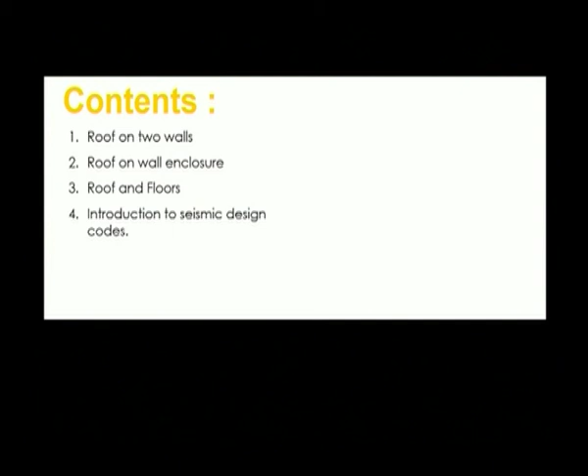Now, in this particular lecture, you would be seeing other various structural or building types or wall types, structure types, and how they would react to the earthquake and how they would behave when struck by the earthquake. So the contents of this particular lecture are the roof on 2 walls, the roof on wall enclosure, roof and floors, and also this lecture introduces you to the next chapter, that is the introduction to seismic design codes.

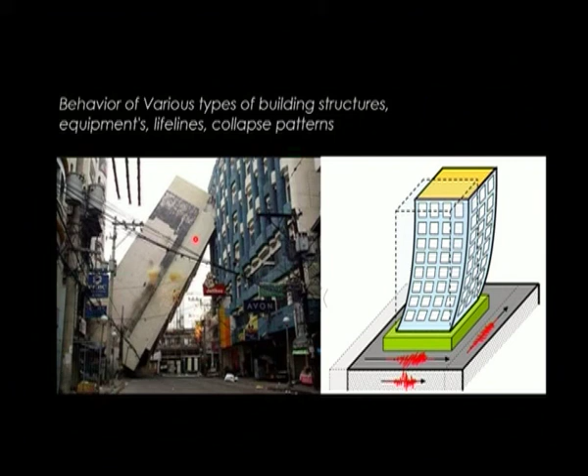So as I said in the previous lecture, behavior of various types of building structures, equipments, lifelines and collapse patterns is what we see in this particular unit, that is unit 2. And as you saw again in this particular lecture, you can see that this building is giving up to the earthquake and falling on another building, that actually creates a stacking and everything collapses on top of each other, creating a larger debris and a larger issue.

Now we will be seeing what will happen if there are 2 walls, not an enclosure, and there is a roof. So there is no enclosure, it is just 2 walls and a roof. This picture shows a devastating earthquake that happened a few years back, and how everything fell on top of each other. So now in this picture you can see 2 walls, that is both B's. These 2 walls are not attached to each other, they are sitting on the opposite sides, and so they are both B's, there are no A walls, and then on top of that there is the roof.

So in the figure, a roof slab is shown to be resting on 2 parallel B walls, and the earthquake force is acting on the plane of the walls. If you can see, this is the earthquake force that is happening on the plane of the walls. So assuming that there is enough adhesion between the slab and the walls, that is, assuming that there is enough stability or enough mortar or enough whatever is sticking the wall and the roof together, that is strong enough,

assuming that is strong enough, the slab will transfer its inertia force at the top of the wall B, causing the shearing and overturning actions in them. So what happens is, when something is resting on top of something, that something kind of transfers its load and tends to take support from what it is sitting on.

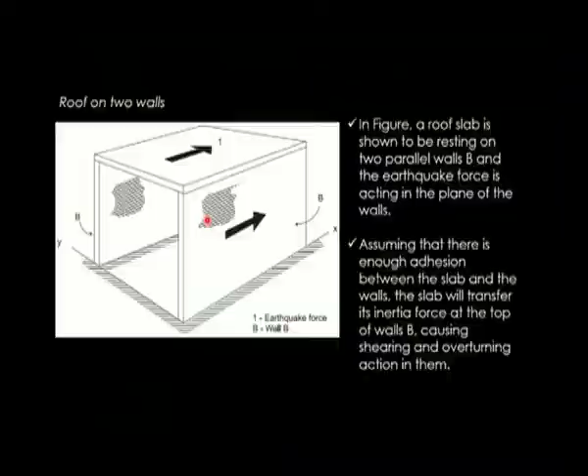So what happens when the earthquake strikes? These walls will have their own inertia acting on them. As long as this particular wall doesn't act as a shear wall, they bend. Because of the inertia coming from the roof to the corner of the wall, as well as the inertia on the wall itself, they try to overturn. If this wall is strong enough and acts as a shear wall, that wouldn't happen, and it will have enough strength to withstand its own inertia as well as the inertia from the roof.

Moving on to the next section, that is roof on wall enclosure. So previously, first we saw just a wall, then a wall enclosure, then two walls and a roof, and now we are seeing an enclosure with a roof on top of it, and what happens.

So now consider a complete wall enclosure with a roof on top, subjected to earthquake force acting in the x-axis. In this diagram, you can see this is wall A and there is another wall A here. So there are two parallel A's, two parallel B's, and then the roof, and this is the x-axis and the y-axis, and the earthquake force is acting along the x-axis, as shown on top of the diagram.

If the roof is rigid and acts as a horizontal diaphragm, its inertia will be distributed to the four walls in proportion to their stiffness. So the roof is completely adhered to the wall, the bonding is really strong, and the roof is strong enough to transfer its inertia into the supporting walls. If the roof is almost entirely rigid, then the horizontal diaphragm will distribute its inertia to the four walls in proportion to the stiffness of those four walls.

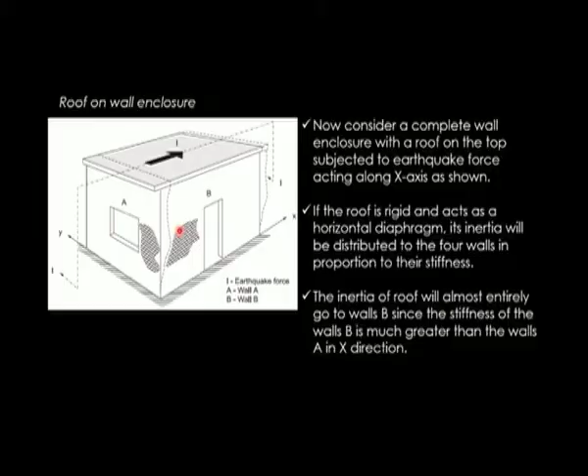In the x direction, since the stiffness of wall B is stronger than wall A and the earthquake force is acting towards the wall in the x direction itself, what usually happens is that if the roof is rigid, they would almost entirely distribute the inertia into both the parallel B walls, not the A walls. So in this case, the plate action of the walls A will be restrained by the roof at the top and horizontal bending of wall A will be reduced.

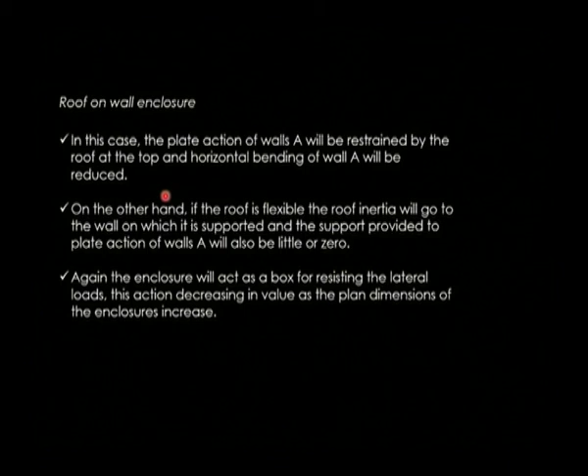On the other hand, if the roof is flexible, then the roof inertia will go to the wall on which it is supported, and the support provided to plate action of wall A will also be little or zero. So already there is a plate action that is happening on the wall, and that will be restrained by the roof because it is not transferring load to that particular wall in the first case that we discussed.

But if the roof is not as rigid as we discussed and it is flexible, then the inertia would be going to all the walls which support the particular roof, and the support to the plate action for wall A will be little or zero. Again, the enclosure will act as a box for resisting the lateral loads, and this action decreases in value as the plan dimensions of the enclosures increase.

The next thing that we will be seeing is roof and floors. So we already saw wall enclosure, and wall enclosure and roof. Now we will see roof and the floor. So an earthquake induced inertia force can be distributed to the vertical structural elements in proportion to their stiffness, as we discussed before, provided the roofs and the floors are rigid to act as horizontal diaphragm.

If you can see in this particular picture, earthquake force 1 is acting, there is a floor, there is a roof. So if the roof is rigid and the floor is rigid, then the horizontal diaphragm action happens, and they split their inertia into the walls based on their shearing capacity. Based on their structural strength, they will be getting the loads, and the building will actually withstand it and stay.

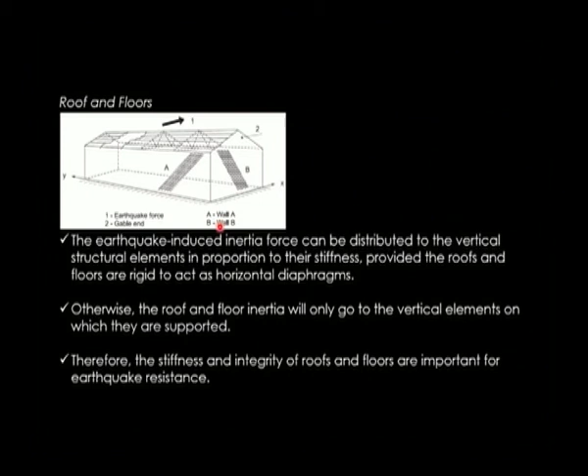So here, these two are the parallel B walls and these two are the parallel A walls. What happens otherwise is the roof and the floor inertia will only go to the vertical elements on which they are supported. So they completely split, and then the weaker wall gives up and the building collapses. Therefore, the stiffness and integrity of roofs and floors are important for earthquake resistance.

Roofs and floors which are rigid and flat, bonded and tied to the masonry, have a positive effect on the wall, such as slab or slab and beam construction cast directly over the walls, and jack arch floors or roofs provided with horizontal ties laid over the masonry walls through good quality mortar. Others that simply rest on the masonry walls will offer resistance to relative motion only through friction, which may or may not be adequate depending on the earthquake intensity.

So it is very important for the roofs and the floor to be rigid, and they should be bonded really tightly with the masonry wall, and also the roof and floor should be strong. Only then can this horizontal diaphragm action happen, and splitting based on the strength of the walls occur. If it is very flexible or a very simple roof, it can only react through friction; if the earthquake intensity is less it may withstand, but if it is more it may not.

So now we will be moving to unit 3, that is seismic design and building configuration.

So, in this particular lecture, we will be seeing part 1 of this particular unit, and we will basically be learning what are the seismic design codes and what does that say, and what are the seismic design codes in India and what does that say.

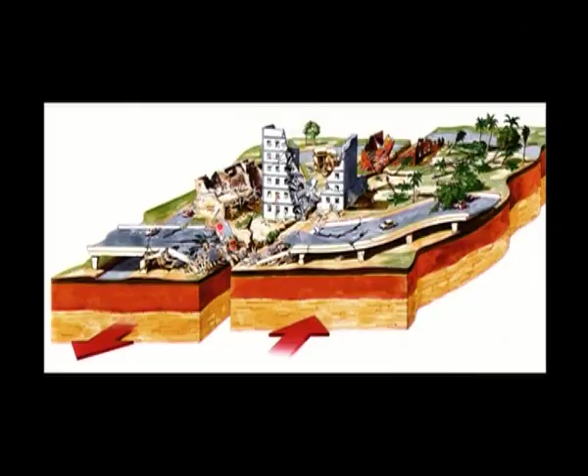So, basically the earthquake history in the past has demonstrated that many common buildings and typical methods of construction lack the basic resistance to earthquake forces. So, when the earthquake strikes, a simple or normal building that we usually construct without understanding the seismic load may not be able to withstand the earthquake like a building that is actually designed for bearing the seismic load. This has actually happened before, and that's the reason why the governments of many major countries have come up with seismic laws for construction.

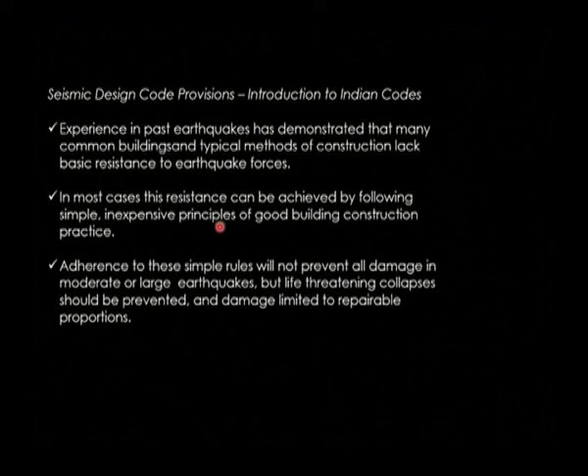In most cases, this resistance can be achieved by following simple, inexpensive principles of good building construction practice. Not everything needs to be very expensive. This is a very small step towards your own safety, the safety of society and of the people. For that, architects are usually encouraged to understand the seismic design codes and codal provisions, and design buildings based on that, at least in seismically prone areas, so that much higher damage due to earthquakes can be avoided. Adherence to these simple rules will not prevent all damages in a moderate or large earthquake, but life-threatening collapses should be prevented and damage limited to repairable proportions.

So, what happens when a very major earthquake strikes is that all the buildings give up, people die, their livelihoods go, and everything. Many irreversible things happen because of the natural calamity, but such things can be reduced and avoided, and the reversible things that might happen can be repaired and brought back to how they originally were.

So, the first and foremost thing we should understand about the seismic design code, especially of India, is the seismic zone. There are basically 4 seismic zones, that is zone A, zone B, zone C and zone D. When an area is highly prone to earthquakes, it would be under zone A, where there is high risk of widespread collapse and destruction if an earthquake strikes. In zone B, there is risk of collapse and heavy damage. From zone A to zone D the risk factor reduces, and zone D has very minor damage and much lesser risk. In zone B, heavy damage and collapse can happen, but the destruction would be much less than in zone A.

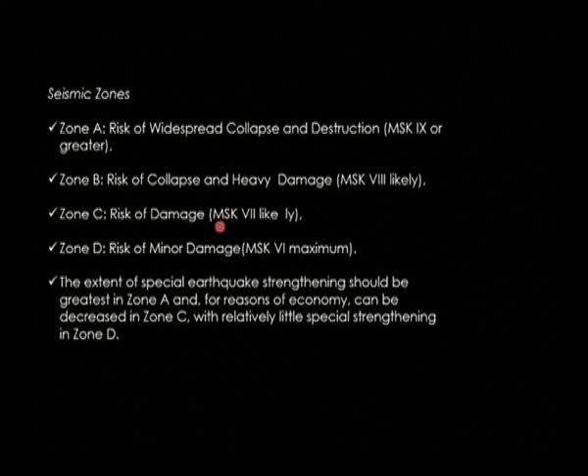The hilly, mountainous areas which are prone to earthquakes would be under zone A. Zone B will be prone to earthquakes, but it might be a flatter area where landslides can be avoided. In zone C, the risk of damage is there, but collapse and destruction can be avoided. And in zone D, there will be very minor damage. So, the extent of special earthquake strengthening should be greatest in zone A, and for reasons of economy can be decreased in zone C, with relatively little special strengthening in zone D.

So, importance of building.

For earthquake resistant design, you should always categorize a building into different sectors. One is where there will be maximum public, where a lot of people will always be accumulated in that particular area. The other is ordinary buildings, where there won't be many people all throughout the day in that particular area.

So, the important buildings are hospitals, clinics, communication buildings, fire and police stations, water supply facilities, cinemas, theatres and meeting halls, schools, dormitories, etc. And ordinary buildings are nothing but housing, hostels, offices, warehouses, factories, etc.

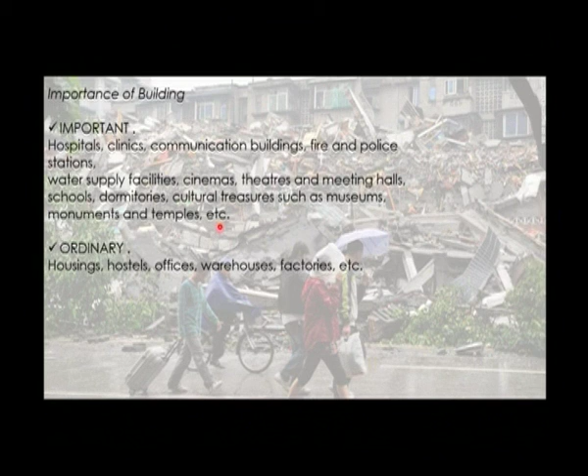So, bearing capacity of foundation soil. As we discussed in lecture 2, the soil variety in a particular site, how a soil responds to the earthquake, and how it gives way or withstands the earthquake is a major factor in deciding on the site of an earthquake resistant building from the seismic parameter point of view.

So, there are 3 types of soil based on our seismic understanding: firm soil, soft soil, and weak soil. A firm soil has an allowable bearing capacity of more than 10, and is very strong; once built upon, it will not give way under your building. The building might fall, but that may not be because of the soil, because the soil in that particular area is really firm.

Then there is soft soil, and these soils have allowable bearing capacity less than or equal to 10. That is, they are moderate. They can give way, but they can withstand depending on the intensity of the earthquake. And then there is weak soil, and these soils are liable to large differential settlements or liquefaction during an earthquake.

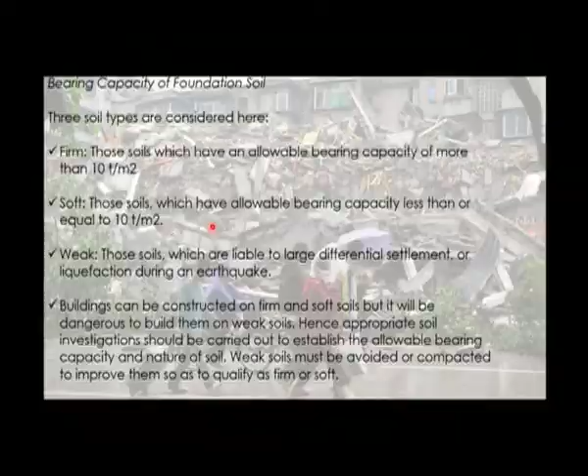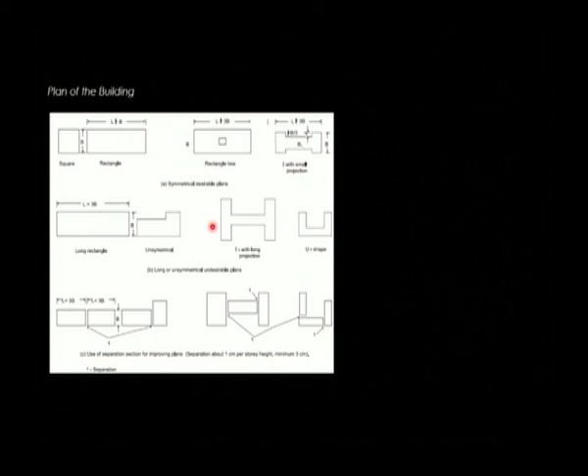Plan of the building. As we discussed before, the plan of the building matters a lot in earthquake resistant design. Very linear buildings should be avoided, asymmetrical buildings should be avoided, many unsymmetrical projections should be avoided, and longer buildings are better if broken and compartmentalized into different buildings.

The next is fire resistance. It's not unusual during earthquakes that, due to snapping of electrical fittings, short circuiting takes place, or gas pipe leakage may develop and catch fire. But fire could also be started due to kerosene lamps and kitchen fires. So, all these things can happen during the earthquake, and fire resistance hence is very important in the areas that

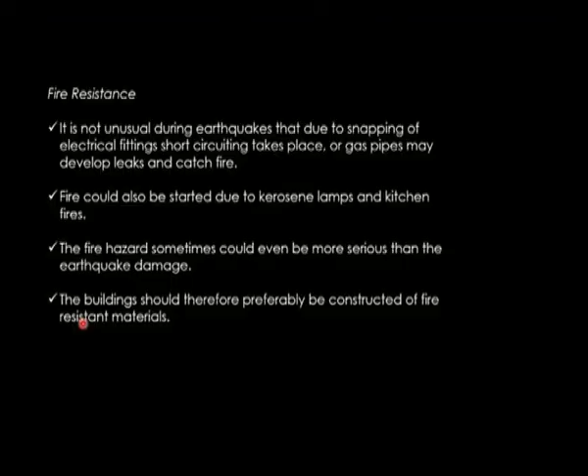are prone to earthquakes, because if fire happens due to the earthquake, it's very difficult to extinguish. The fire hazard could sometimes be even more serious than the earthquake damage. The earthquake might be minor, but many repercussions might follow, fire among them, and because of other things happening around, it is very difficult to extinguish or control the fire.

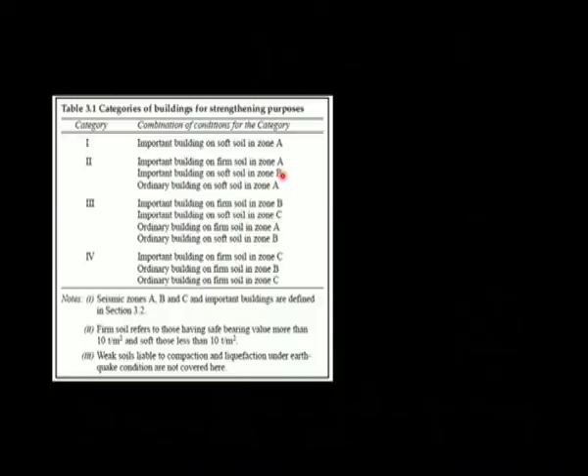Moving on to the last and the major factor that affects the stability of a building during the earthquake, that is the foundation. For the purpose of making a building truly earthquake resistant, it will be necessary to choose an appropriate foundation type for that particular building. A foundation type is usually directly proportional to the load bearing ability of the soil, what is the bearing capacity of the soil, and what is the soil in that particular area. Since loads from the typical low height building will be light, providing the required bearing area will not usually be a problem.

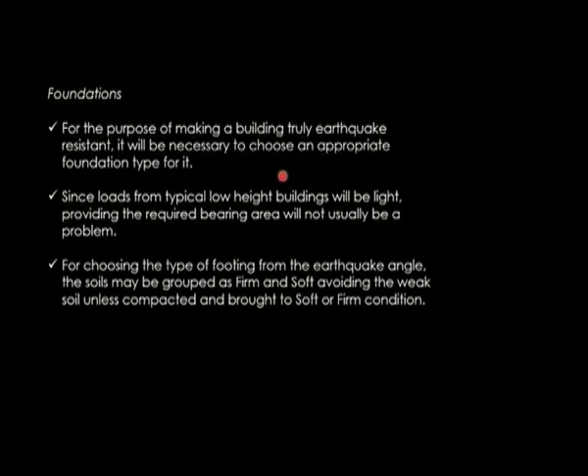For choosing the type of footing from the earthquake angle, the soils may be grouped as firm and soft, avoiding the weak soil unless compacted and brought to soft or firm condition. So weak soil can be compacted and made into a soft or firm soil. But usually, when designing an earthquake resistant building especially, it's better to go for sites where the soil is firm or soft. Hence, based on that, the foundations are designed, and foundations shouldn't be shallow; they should be deep enough so that liquefaction doesn't happen on top of the foundation.

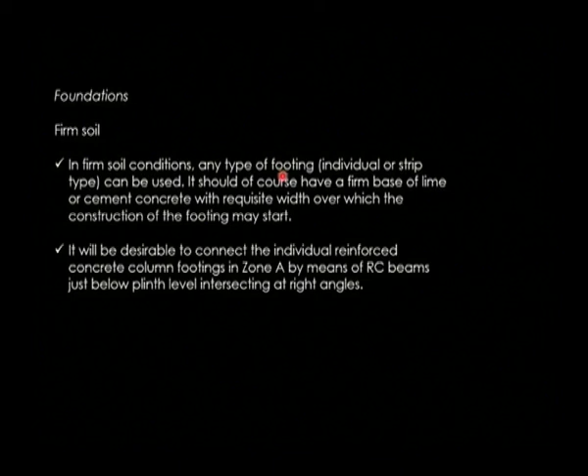In firm soil condition, any type of footing, individual or strip type, can be used. It should of course have a firm base of lime or cement concrete with requisite width over which the construction of the footing may start. It will be desirable to connect the individual reinforced concrete column footings in zone A by means of RC beams just below plinth level intersecting at right angles. And in soft soil, it will be desirable to use a plinth band in all walls where necessary. It's necessary to connect individual column footings by means of plinth beams as suggested above. Continuous reinforced concrete footings are considered to be most effective from earthquake considerations, as well as to avoid differential settlements under normal vertical loads.

So in summary of this lecture, we saw how a roof on two masonry walls responds to the earthquake. We understood how the roof would transfer the load to both walls if the adhesion between the roof and the wall is good, and if the wall has enough shearing capacity, it might withstand the inertia from the roof as well as its own. We saw the performance of a wall enclosure with roof for earthquake resistance, and how the roof transfers the load to the walls based on the shearing and bearing capacity of each wall.

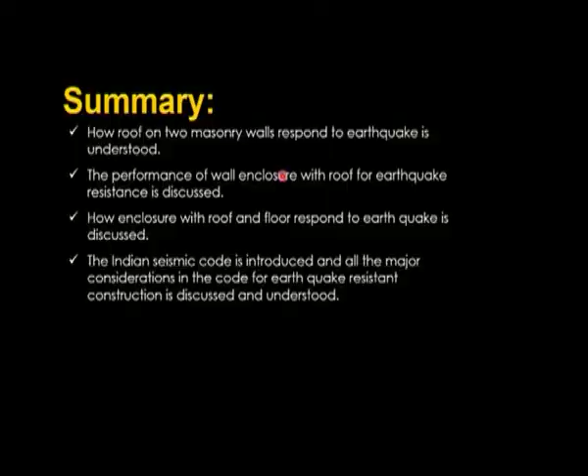We saw how an enclosure with roof and floor responds to the earthquake, and we understood that if the roof and floor were strong enough and the adhesion between the roof, floor and walls was strong, they would distribute the load to the walls based on the bearing capacity of each wall. We also introduced the Indian Seismic Code, and all the major considerations in the code for earthquake resistant construction were discussed.

Moving on to the questions. How does a roof on two walls behave during an earthquake? How does a roof on a wall enclosure behave during an earthquake? Elaborate. How do roof and floor respond to earthquake? Elaborate. What are the considerations for seismic design as per the Indian codes? Discuss in detail.

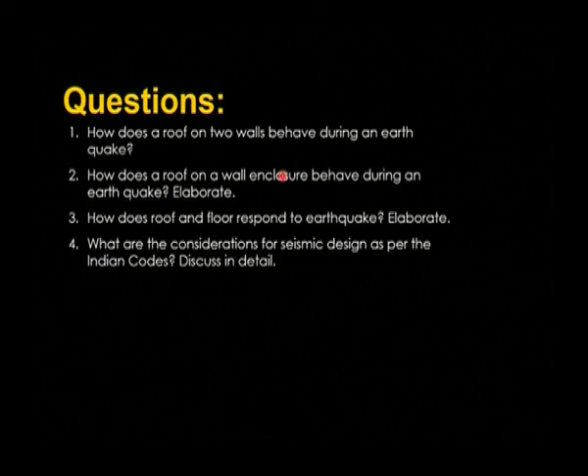In the next lecture, you will see how each type of building, masonry buildings, wooden buildings, reacts to the earthquake, how cracking happens, and how they can withstand it. What are the positives and negatives of each building material from the seismic point of view, and how they can be used for designing and coming up with a positive solution to create a better seismically efficient building.